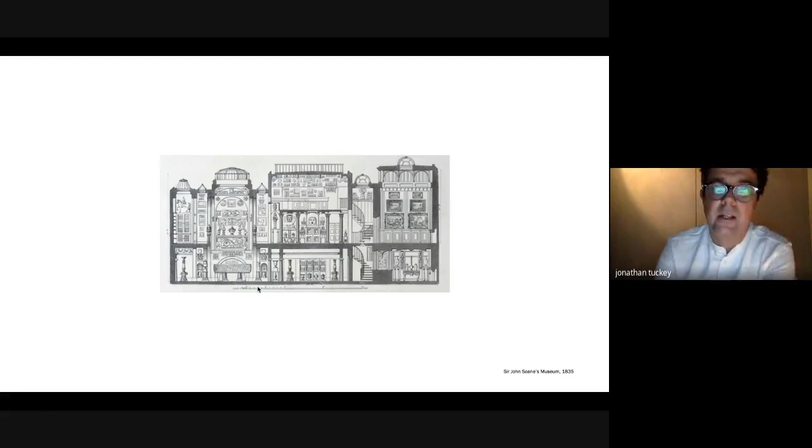And I think it's that idea that a building is made up of parts that are all performing their own function that is a way you can look at and understand a classical building. You can take a classical room, and it's somehow similar. To repeat what I've said about the column and then the section, those separate components equally exist here. It isn't just continuous between the base of it and the top.

The room in itself has these datums and proportions and delineations that determine that the ceiling is somewhere different from the floor. And this is different from a modernist building. If you think about a modernist building and a modernist column, that set of components is very different.

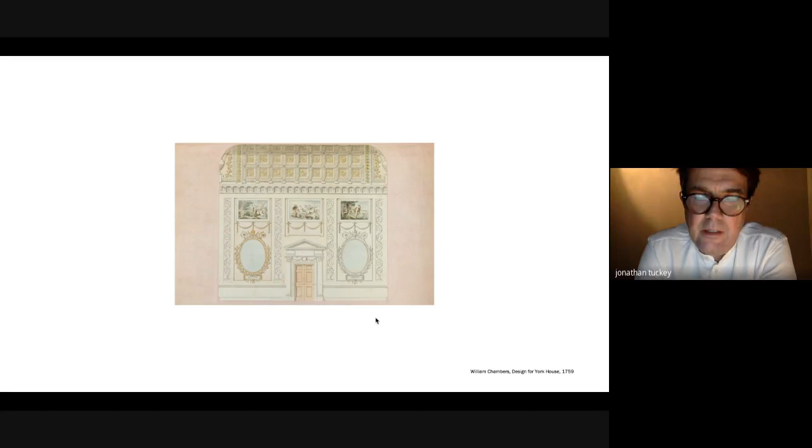And the rules get rewritten in the 1920s when the modernists appear, and Corbusier particularly writes a lot about it. But I think it's about understanding buildings older than that in this way of the components, and normally those components represent scales, small, medium and large, bottom, middle and top, and it's about those things each providing a different function.

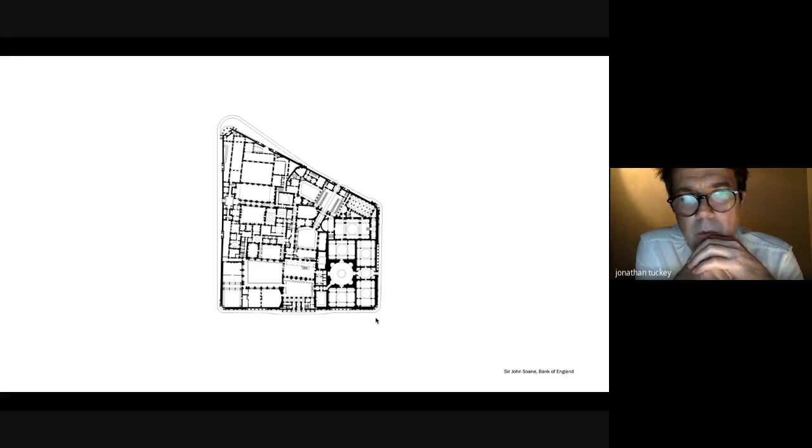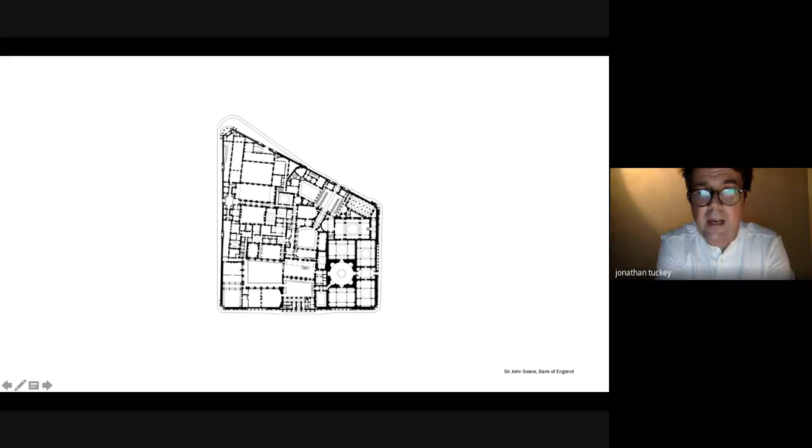This is a plan of Sir John Soane's Bank of England that he designed for the Bank of England in the centre of London, and the intriguing relationship I showed you in the section on those last two images is just as visible in a plan. There's nothing uniform about the arrangement and the accumulation of spaces. The arrival is a distinct and different proportion from the next sequence of spaces that take you from one space to another, and each of them will be appropriated a different proportion, and that will to some degree determine the use of that space.

So there's a large space for a bigger amount of people, and a small space for a smaller amount of people, or a large space for a certain atmosphere compared to a small space for a different atmosphere.

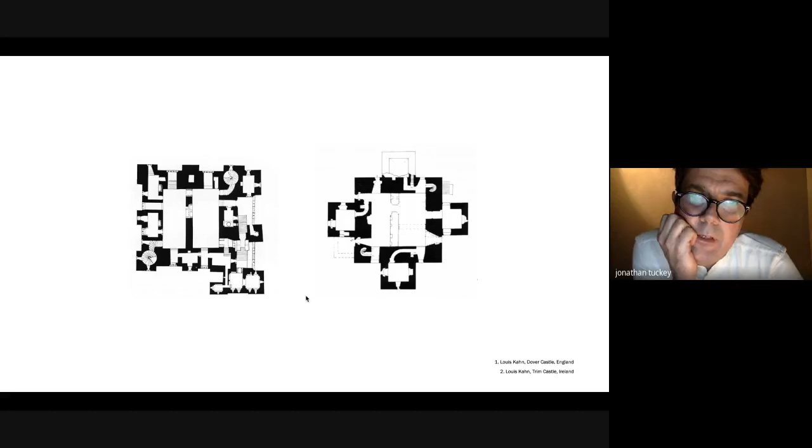And whether it's a classical building or this is a medieval castle that was drawn, Louis Kahn did these beautiful drawings and studies of castles at an early stage of his career. A lot of these castles in Scotland, he drew them for a different reason, which was about how to understand the primary space and the spaces that support it, the principal room, the servant space and the served space, and then the spaces that serve it.

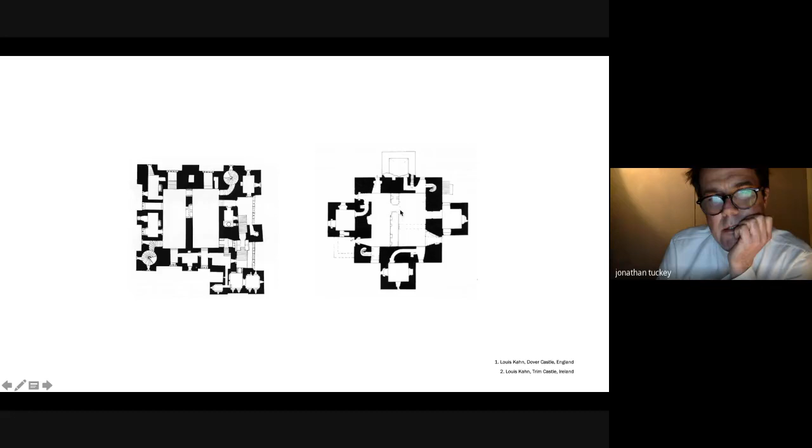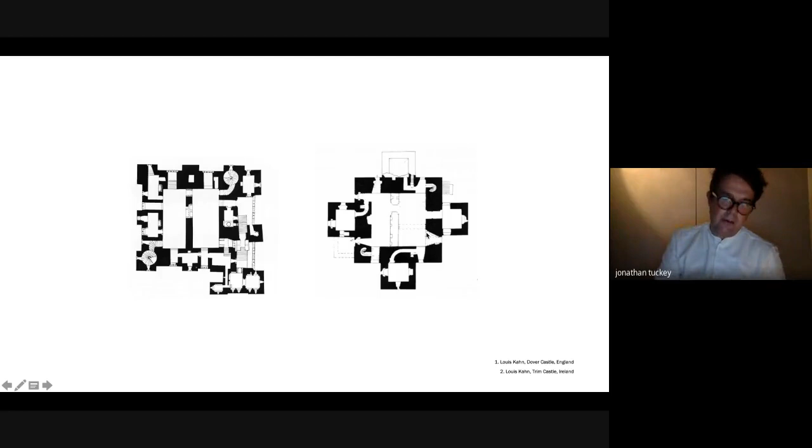And again, my observation and point about this is that they depend upon one another to perform their individual function. They have a symbiotic relationship, that if you take all of those spaces around the perimeter away, this no longer can perform its function because it can't be served by those spaces around it. And equally, if you were just left with those perimeter spaces without anything to serve, they would be without their function.

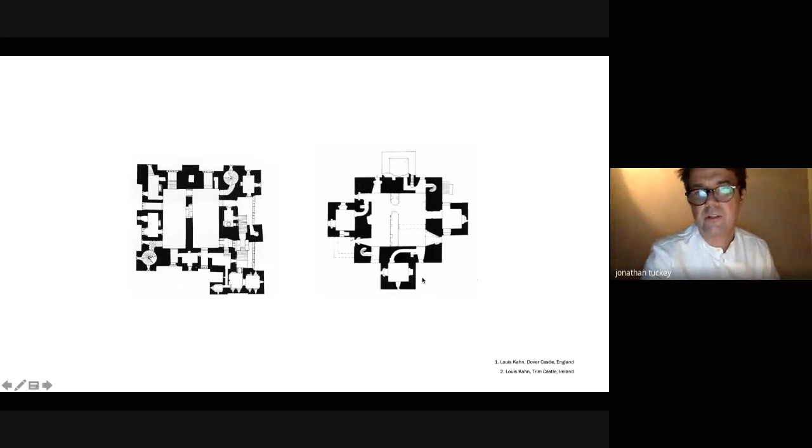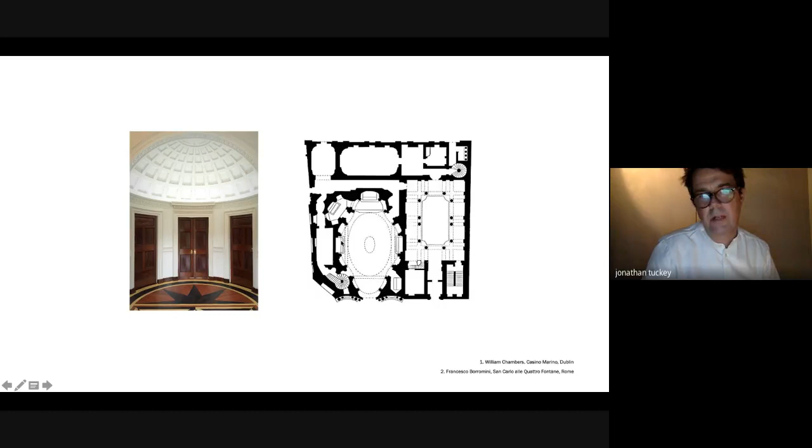And I think the same is to be said about these spaces in classical architecture in particular. You get this beautiful freedom with which to create spaces of different volumes and shapes, so that they can perform a very different spatial arrangement. And this very beautiful vestibule here allows the orientation of you to move through a space and then into these various different antechambers off it, in a way that a simple rectangular space is less able and less easy to manipulate and create.

So now back to the project itself and the plan that we started with. Are these clear for people to see? Are you able to see this, Adam? Yeah, that's clear. Cool. Okay.

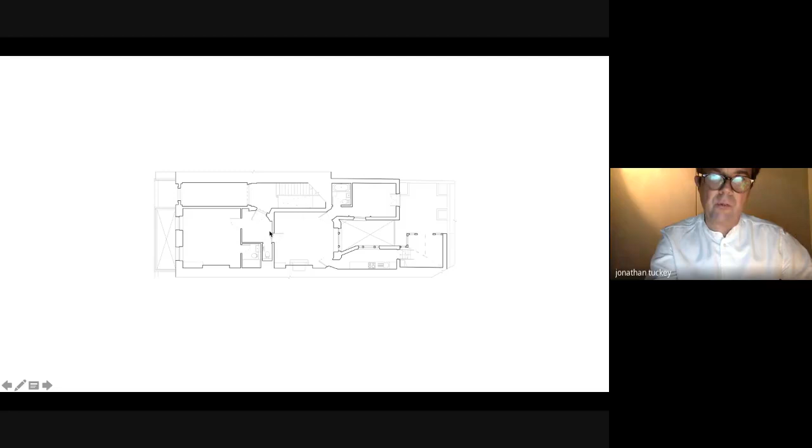So this is the apartment that the client came to us with. As I said, it's on Upper Wimpole Street, which is here, and it's a ground floor apartment. It's already been changed, but you can start to see in the thicknesses of walls that when it was originally a single house, you'd have walked in through this hallway here, and off that hallway you would have had one principal room here, and then another supporting room there, connected possibly by large double doors.

So, thinking of the Louis Kahn analogy, this is the space that serves these two spaces. They can't exist without one another. And my point about the street: you can tell that when the whole building was a house, this would have been the front room. And the front room in buildings like this would have been almost rooms that were a gift to the street, a space that you never kept closed.

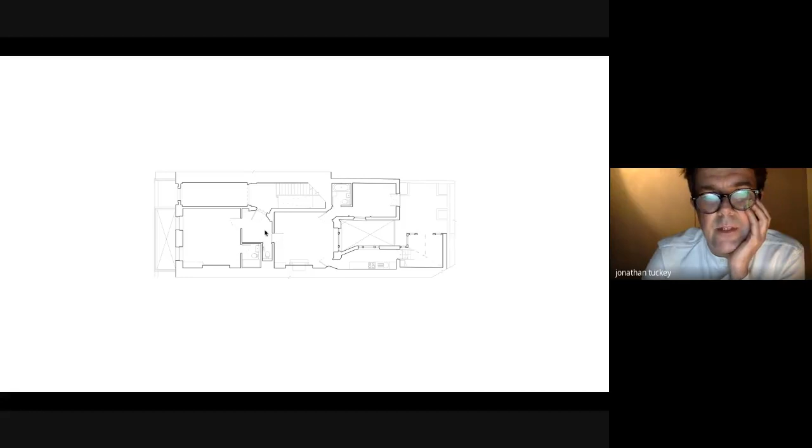You only performed the more public functions of life, special occasions, Christmas, birthday celebrations, or whatever it might be. And the idea that that front space needed to be separate from the street was never a necessity, because there were always other spaces behind where you could put your feet up on the sofa or watch the television. It had in itself these filters that were already implied, because you had other spaces on other levels for the acts of sleeping or retreat from the street.

For some reason, occasionally my mouse stops working, but anyway.

So if you ignore the new things that were added, the toilets here, the hallway here, and these other spaces, this plan would have been very legible and would have been a hall, a large room, and then a medium-sized room. And then possibly, I don't know, but I'm guessing some supporting even smaller room there, so that in a sense the most private part of the house on the ground floor would have been here.

And you would have walked through the rooms there. There would have been no internal corridor. It would have just been a sequence of 3 spaces, because you had all the spaces upstairs. Someone at some point, because they needed to, converted this and added some bathrooms and hallways into it. So by the time we arrived, you had a small hallway here, and a little bathroom associated with a bedroom, a bathroom associated with another bedroom, a small kitchen, and then they'd built this little glass box in the garden for eating, I guess.

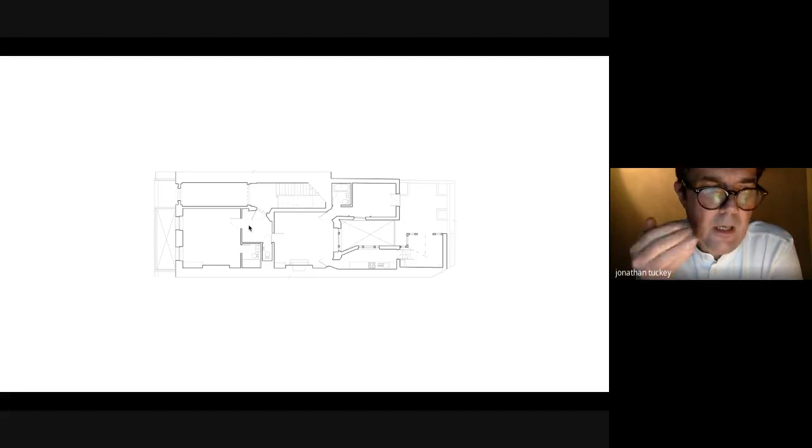I mean, I know it's not the case when you're in a student hall, but the idea that in a house there are a number of spaces that take you to that more private space is a convention that certainly in European and UK domestic architecture is familiar, and they felt very compromised between the bedroom and the hallway.

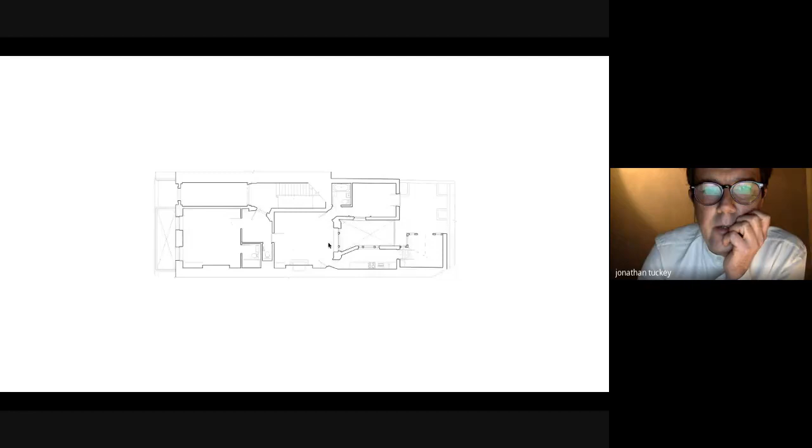You would come in to the hall, and if you wanted to come into the main room, the main feature was this fireplace, which obviously is destroyed immediately once this partition goes in. We had to keep the partition because they clearly needed a bedroom and a hallway. So what we built was another piece of joinery, another piece of cupboards that forms an equal curve to that, running around that side there. This WC went and becomes part of a bigger bathroom there.

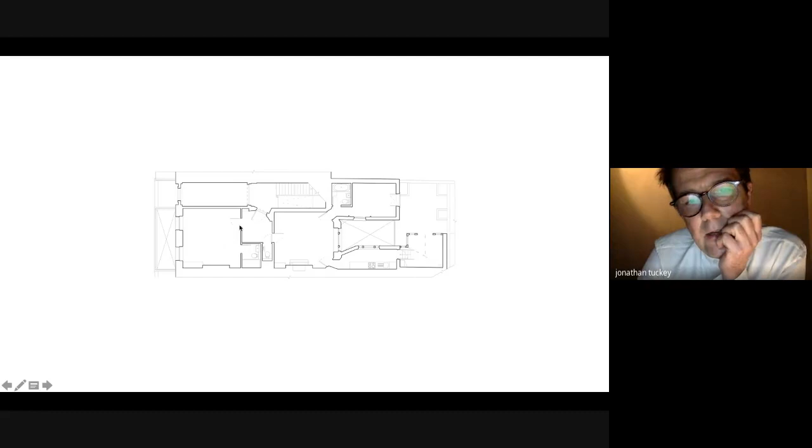And that simple curve there that then runs into the joinery that you saw a picture of here means that as you come in, I think it softens that arrival. You're not looking straight at the corner, and it directs the main flow of the public route, if you think of it as guests, in to that curve and into that space there. So that's that curve there. It's actually where their coats and shoes are kept, but also guest coats and things like that, essential storage for the flat that didn't have much.

Previously the floor throughout was just all timber. Again, it was modernist in its agenda, in the sense that it was one floor finish throughout. It was completely uninterrupted and didn't allow you to pause or think about a change in pace between the arrival and the next space. So we laid in this area these tiles just to act as a kind of stasis between the arrival and the spaces beyond that.

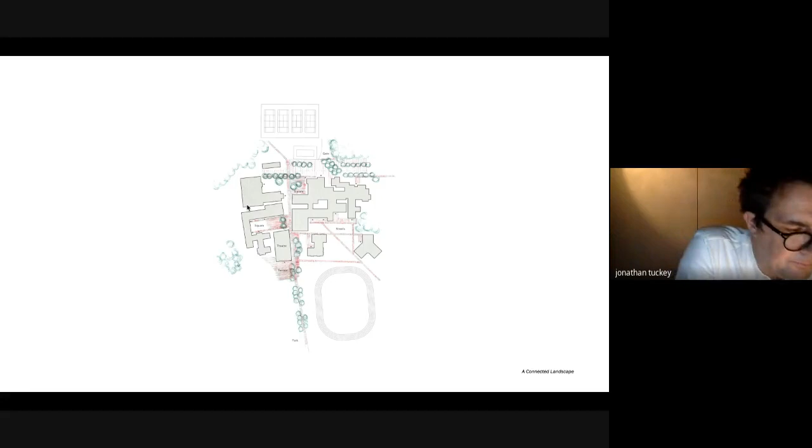And he felt that if we were to think of this as a kind of mini town, it was essential for education to have a permanent theatre, a theatre that formed a permanent function within the life of the school and within the education that people were being provided.

You'll probably know this, but the origins of theatre in an ancient sense are that it was really the place in the city, the town or the community where you could act out things that were not allowed in everyday life. You could fall in love with someone you're not meant to fall in love with. You could kill someone when you're not meant to kill anyone at all.

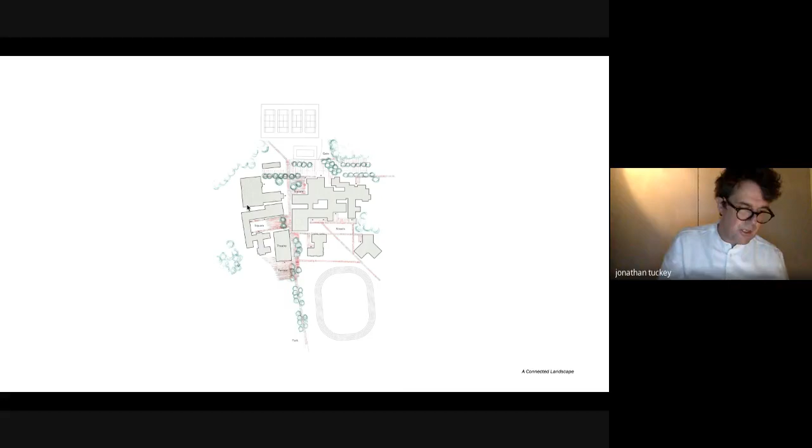Its role was to provide the full spectrum of activities that are forbidden by our normal conventions of life. The theatre used to be outside the city walls, and was for people to go and let their hair down, both to see things acted out and to break taboos. That's what theatre was always for.

It's only much more recently that it's often become quite a stiff and uptight place, to be quiet and have the lights down and watch something for expensive tickets. Actually, its role was really to challenge the conventions of life and to test out breaking the rules.

And he felt that in a place like this, in an education curriculum, theatre really needed a permanent home, not just for school plays, but for drama to become an essential part of the curriculum and for people to learn how to perform.

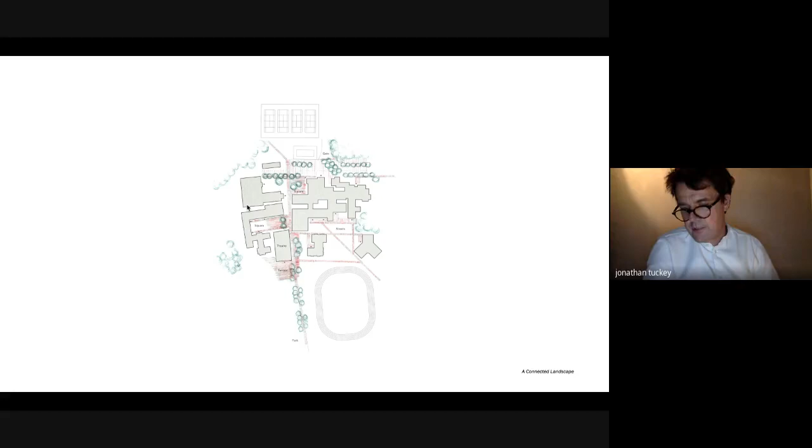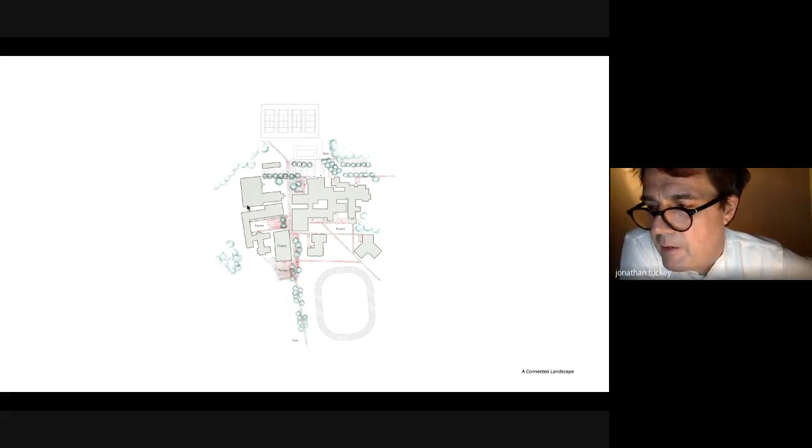I mean, I know you know that's what's amazing about an architectural education is you have crits and you have to stand up and present things, and it's an amazing, terrifying but amazing thing to have to learn how to do. And actually, if that can be part of everyone's education, it kind of empowers you in later life to understand what presenting something is like, standing in front of a group and shouting something out, singing something out, or showing something off.

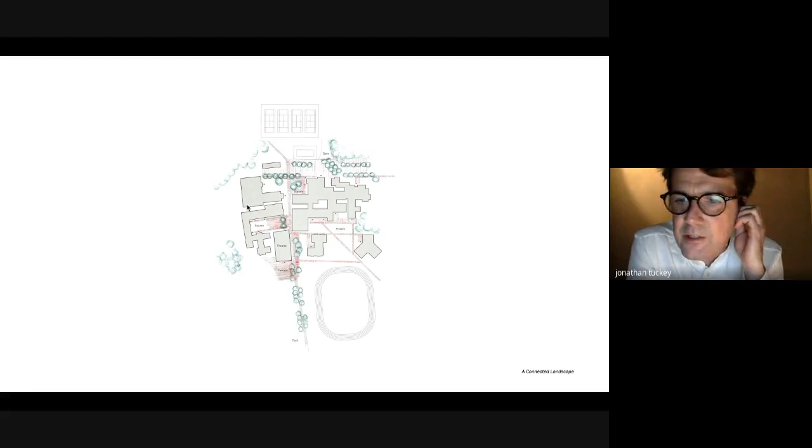So that's why he felt that theatre couldn't be just in the gymnasium. It needed to have its own place, and it needed to have fixed seating that couldn't be swept away. It needed to have a stage that was at the right height, and it needed to have the acoustics that people didn't have to feel intimidated by an echo, that the acoustics would work for a single pupil. Or, sometimes these pupils were young, so something that worked for them.

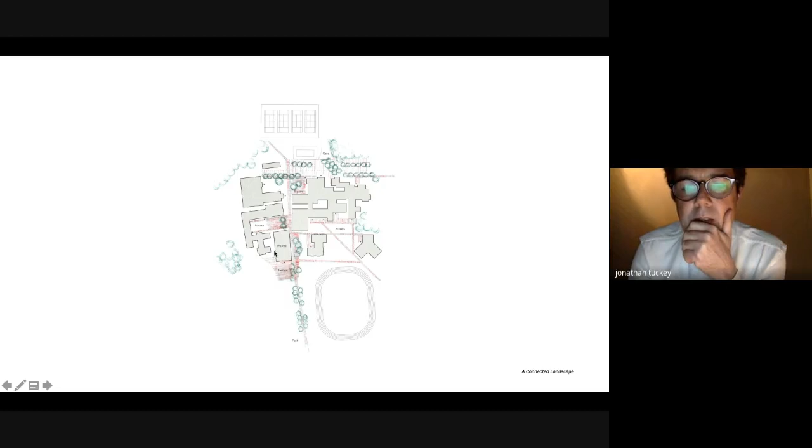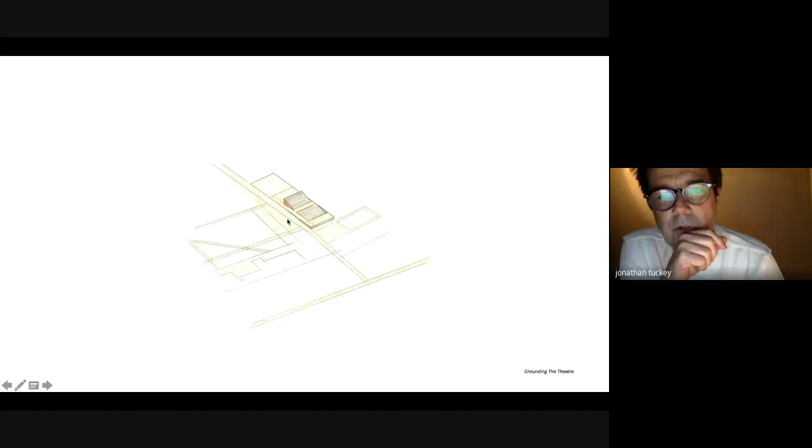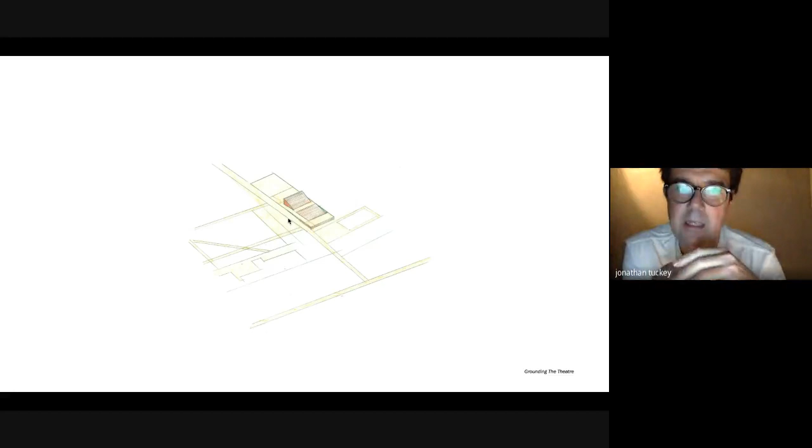So that became our remit, this site here, and thinking about how if the DT building moved the facilities into one of these other buildings, we'd place a theatre in this location. And this is a kind of early drawing of the streets of the school and the various different alleys and courtyards and routes through it, and how we felt the theatre had a permanent ground, like the seating was both dug in and raised out of the ground, and we and the headmaster were completely aligned that we didn't want the seating to be one of those removable seats that sort of compress away. It needed to be an absolutely essential part of the landscape.

That's something very permanent, and this is a drawing just thinking about how we could make something that was kind of forever, indelibly part of the landscape. If the building above it blew away at some point, this arena for performance was always going to be there and indelibly, irremovably present.

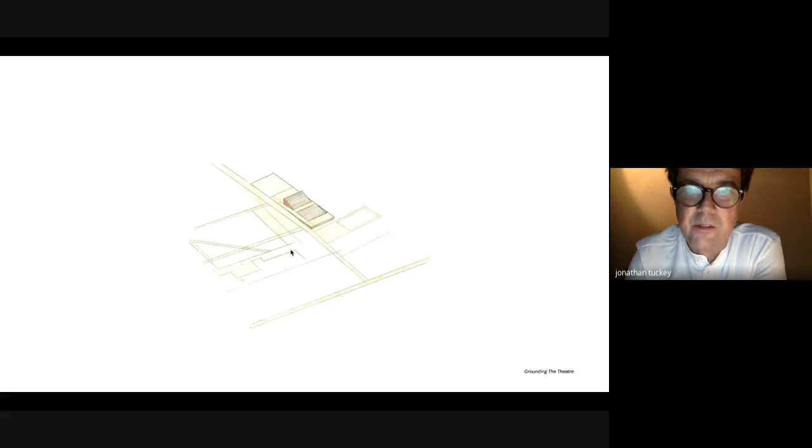These next five or six drawings were a bunch of drawings we did at the competition stage. There was a competition to get the project. I think six or so people were asked to do it, and these were done over the course of a week when we got their brief, and to some extent the project is very different, but to another extent some of the original ideas are still there.

So we just said, you've got this kind of amazing avenue of trees, and at the moment it feels like the school's on the right and the sheds are on the left, but let's make that kind of avenue into the city, you've arrived in the town and that's the town square. So could we think of the building as not just a theatre, but could it actually have a function that was like a civic square, like the kind of meeting place for a community?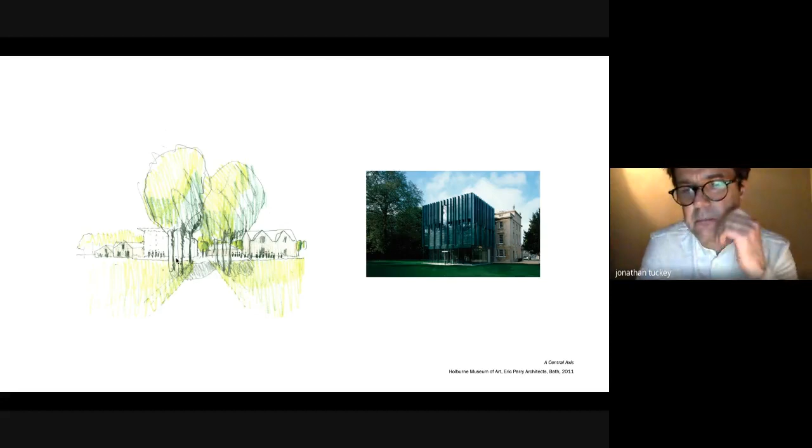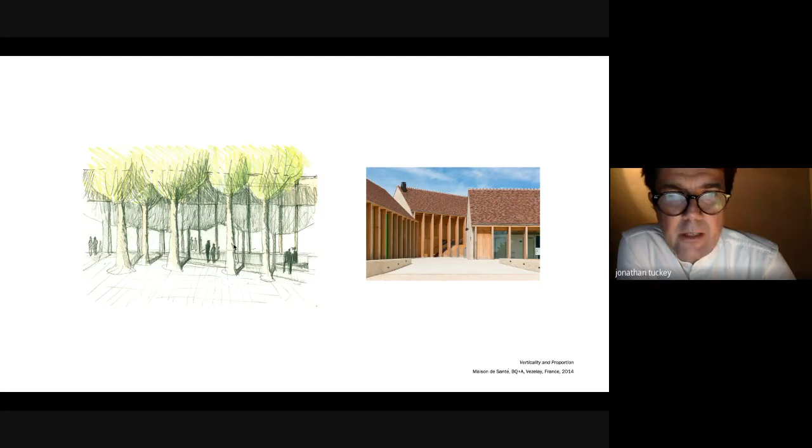We liked the fact that these trees would always produce sort of beautiful shadows on the building, and almost like a colonnade, a place for you to gather when it's hot and sort of hang out, like you see people sitting in the colonnade on a market square or something. Could the trees themselves become part of that? And maybe the facade could have something of the rhythm of those trees.

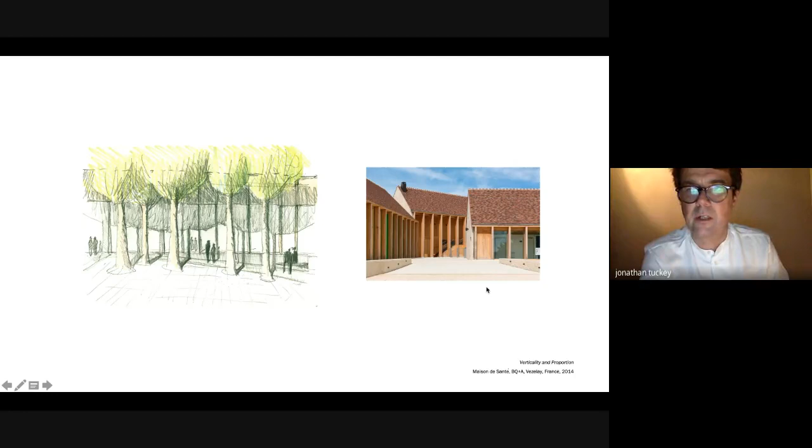In this case, we were imagining we were going to have a little gallery on one side of it that was partly open to this colonnade, showing this idea of what it could look like. That was going to be the gallery on the inside. The idea was the entrance was along that side. You'd walk through a gallery and into the theatre, so we were constantly trying to think of ways in which other things could come into the theatre, so that it wasn't just the drama kids or the assembly in there, but the art pupils could hang up their art in it, or there could be exhibitions in it.

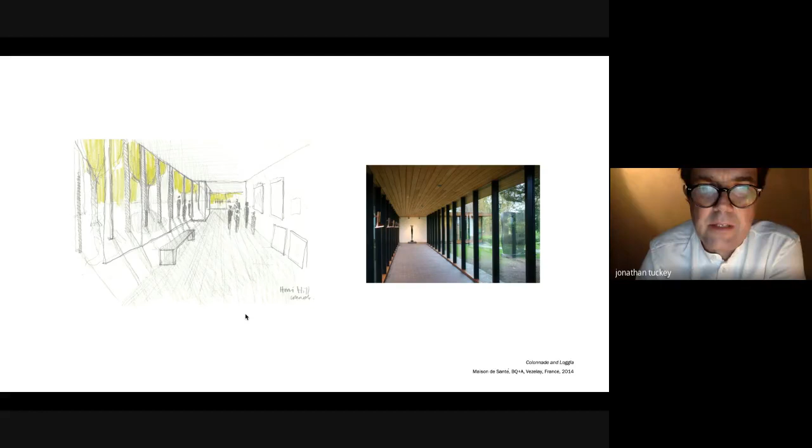So I think it was, and is, the nature of a lot of architects to always try and expand the brief. And we thought maybe it would be a nice idea to bring a gallery into it. As with all these things, a lot of them got cut because of cost, but the ambition was again to try and make the building as public as possible, or used by as many people in the community as possible.

And then this was the kind of front. At this stage, we had the front coming from the south. I don't know why we did, but we did, and it was.

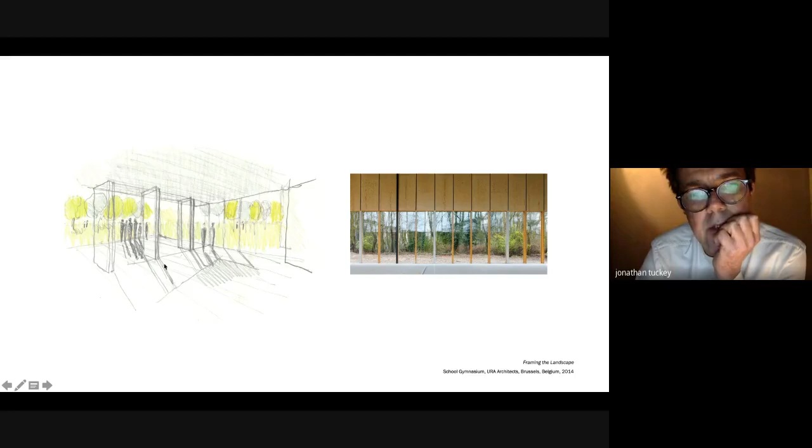You'll see we changed that, but you'd come into this foyer and then you go down the hall, you come down the gallery, and then into the main theatre. And then we

also felt that it felt a shame to have a black box, a box that was great, perfect for theatre, but was pretty soulless for assemblies or for daytime drama lessons. So if we could have windows that looked at the trees around it, but then could be covered up by curtains or shutters or something, so that it could be as good for someone playing a concert during the day as for a production in the evening.

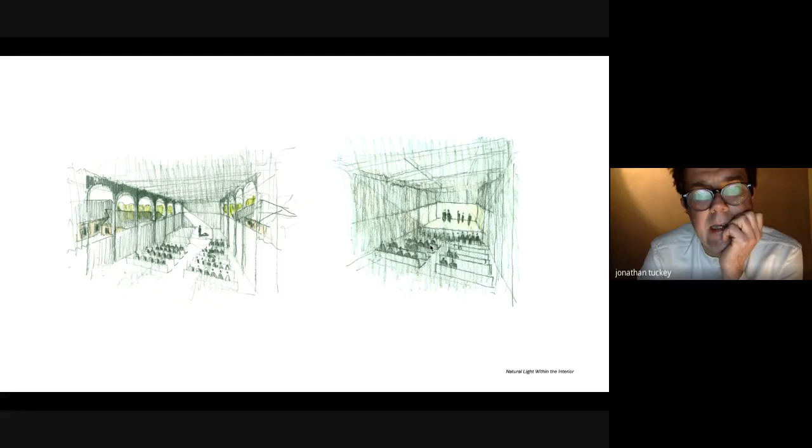So we were interested at this point in making it as useful to them during the day as it would be in the evening. And I think there was and still is, environmentally, I always think it's crazy to just have buildings or rooms that you go into and you have to turn the light on. It would be nice to come in, even if it wasn't always bright, at least you could see. It just feels our responsibility as architects is to think in that way, that you can go in and there's daylight. If you need to just go and get something, it's not about always turning the lights on and therefore leaving them on.

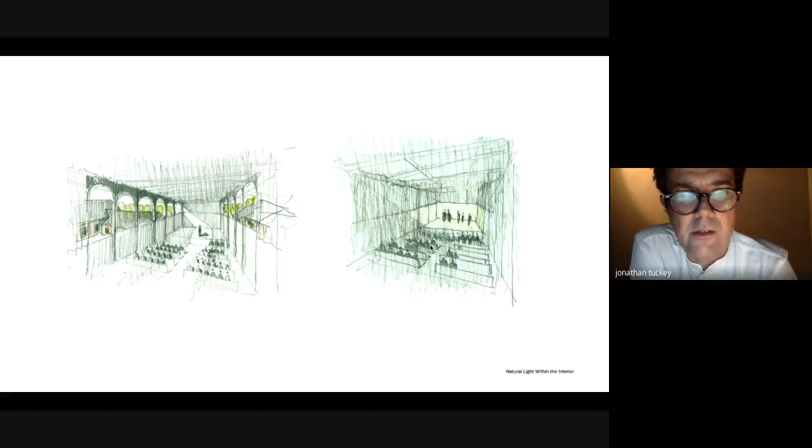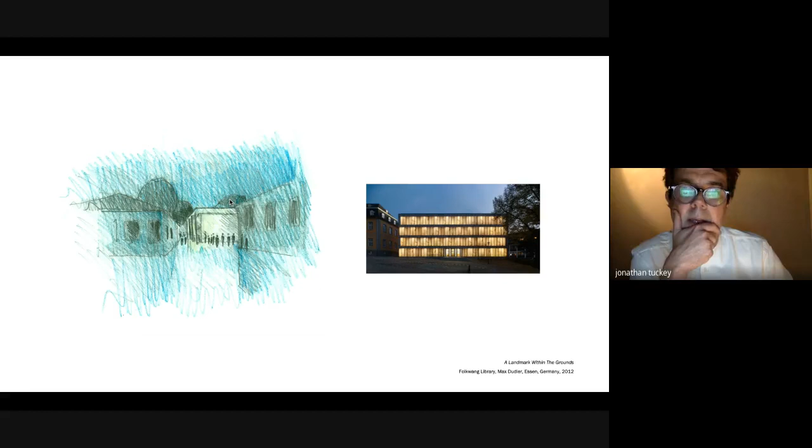And we thought a lot about how it might be a lantern at night, so that as you arrived in the school, this is a view of it from the other end, but as you arrived into it or saw it at night, times of the year like this when it's dark from about 4 o'clock, and the pupils are still at lessons, it could act as a bit of a lantern in the middle of the school. Again, really just trying to think of ways in which we could make it more central in the life and in the position of the school.

There was an idea at one point where it could feel good for just the school, but when everyone's parents were there, it would also feel good. So we didn't want it to feel empty when the parents weren't there. So that was going to be closed off. On assembly Monday morning, it'd be closed off, and then when everyone was there, it would feel full. So there was an idea at this point of a way in which it could expand and compress depending on the amount of people that were there.

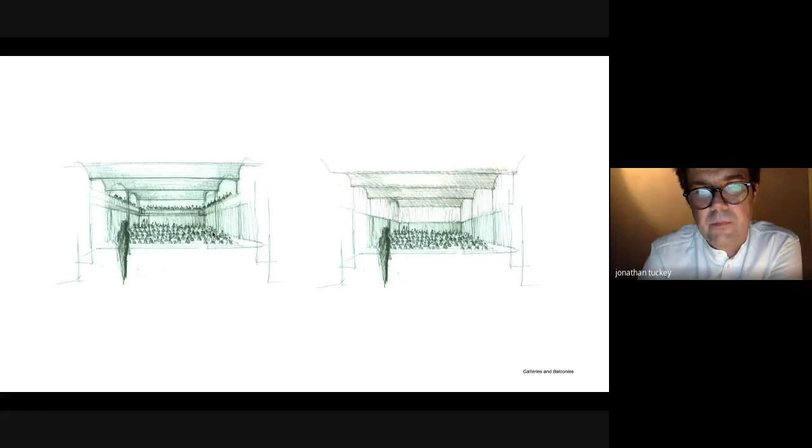These, again, were all ideas, I guess, that helped conclude the competition rather than what we ended up with. And because at that point we had turned it a different way around, we thought that maybe at the back of the theatre, at times when they wanted to be outside, they could open massive doors and perform or gather people in this space here. So you get 120 people in the theatre, but you could have 240 people out here on a summer evening, and it would actually be an outdoor stage.

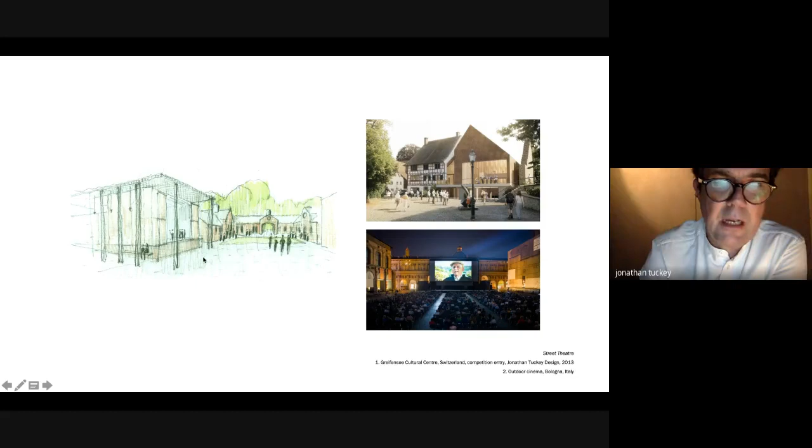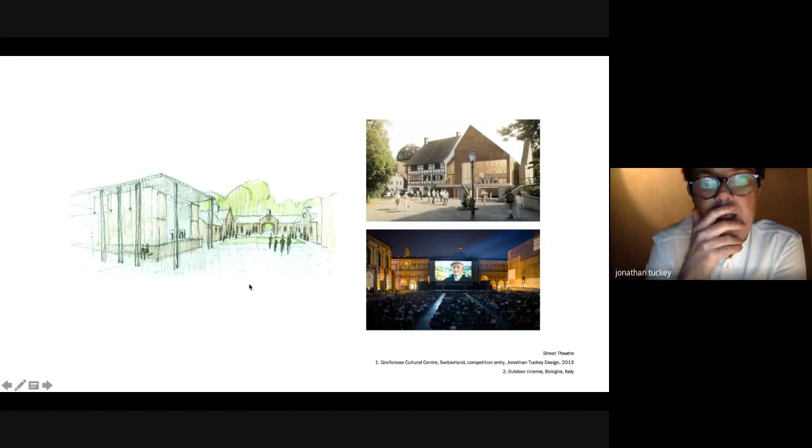So at that early stage, just like the gallery idea, we were thinking of how many things we could add to this theatre, so that it wasn't just a theatre. They were having to raise money, and we wanted to say to them, let's not make this just a theatre, let's make this a theatre, an assembly hall, an outdoor theatre, a gallery, and have all these other attributes and components to it.

And there was this drawing about how the building should be able to heat, light and ventilate itself. The thing with theatres is you don't really have to heat them, because when they're full of people, each person that sits in the theatre gives off 100 watts. So if you've got 12 kilowatts in there, it gets warm very quickly. So all you've really got to do is ventilate it, and you can either do that mechanically with air conditioning, or you simply open louvers or ventilation at the bottom on either side, and something at the top, and you get this chimney effect of cool air coming in and the hot air going out.

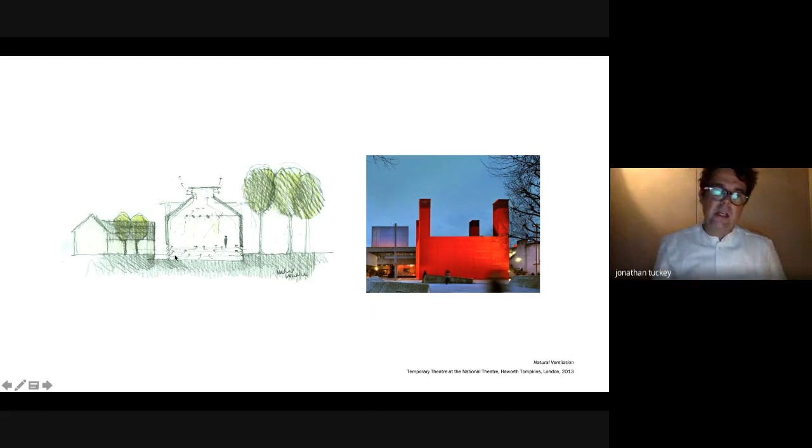And this is a nice temporary theatre that Haworth Tompkins did in London for the National Theatre, and that's what these chimneys were for: cool air brought in at the lower level, and taking the hot air out. We felt that would be a really good strategy where you could avoid expensive and environmentally insensitive ventilation, and just bring air in and bring air out.

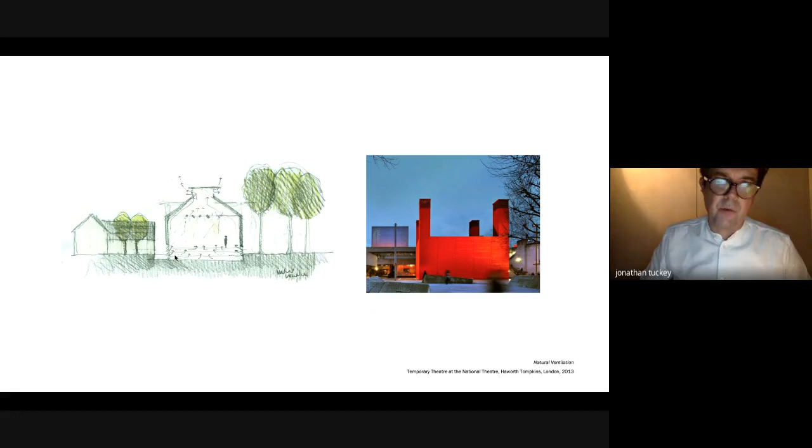So those were the initial kind of things that we pitched to the client. The things that kind of were in our mind that we had knocking around the studio at the time, which we didn't really share with the client, were images like this, which we kind of knew that

we knew that a theatre is essentially a kind of massive box, and in the wrong hands, that could just become like a kind of enormous B&Q shed, really. I mean, we needed to think of a way in which we could articulate the facade like these buildings in Florence here, which would bring a three-dimensionality, a thickness, a kind of layering to the facade. So we didn't know how we were going to sort it out, but we knew that we were interested in kind of ennobling this shed.

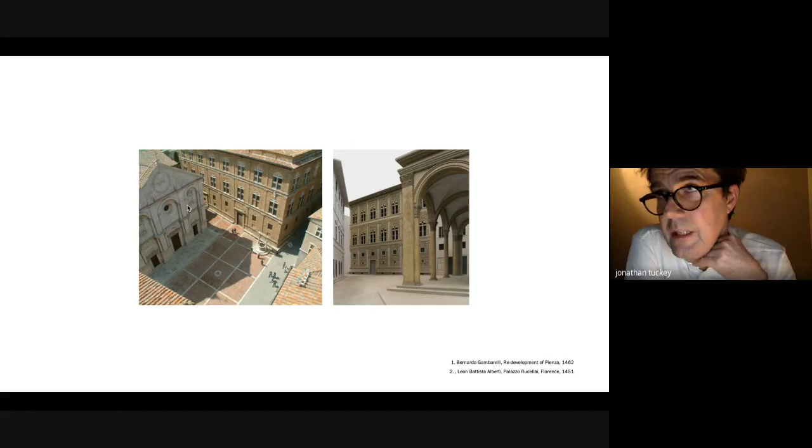And these architects, Alberti and Gambarelli, but also Palladio, were in their time extraordinary at introducing proportion to facades that allowed a kind of three-dimensionality to them that broke up and articulated a building. If you actually think about this building here, it's got three openings on that level and one opening on this level, but the kind of layering and the drawing on the facade of these different sets of proportion, a bit like that classical order, completely determine and delineate it.

We also thought that this was an idea for us, the kind of civic square, creating a square, and we noticed that this one was north facing, and it gave us confidence that maybe we should flip the building round and have the front of the theatre where I previously had the back, and you would come in through the front door, and that courtyard of spaces would actually make it a proper square, rather than leaving the theatre into the playing fields, which suddenly felt so wrong for us.

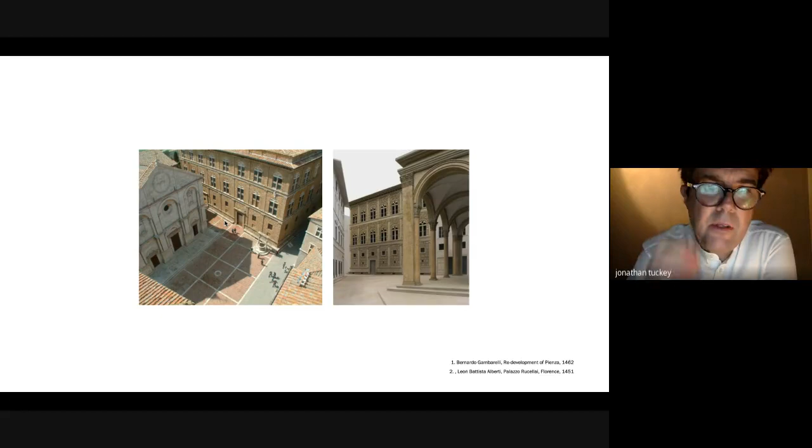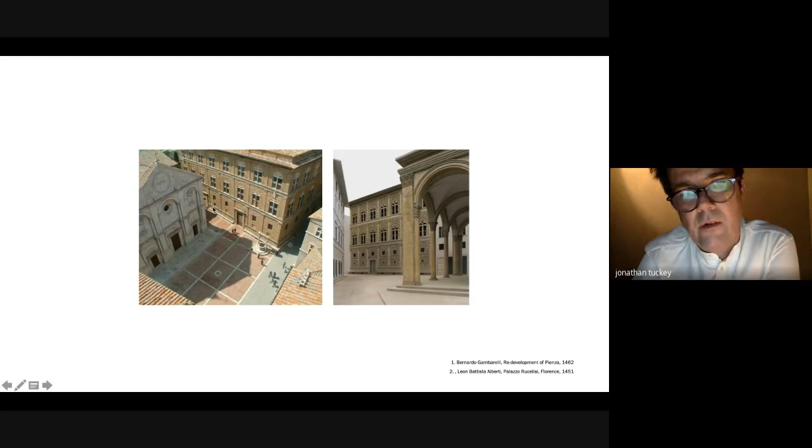And we liked the fact that these buildings were sometimes at different angles, and that we didn't feel that we had to align our new building necessarily with the ones adjacent to it. So that kind of tapering between this building here and that building as this one heads off was something that produced quite an interesting dynamic and proportion to the very different spaces.

So we had the stage and the backstage, and then the auditorium, and then we thought adding some sort of portico onto the front would really signal and signify the entrance and gateway. And because it might have these multiple functions of a theatre entrance, but equally assembly, there might be a side door directly into the auditorium that the pupils would use every day for assembly. They wouldn't always come through the front theatre door; that would be for the production. So just by entering a door, it adds two different faces to how the building was used.

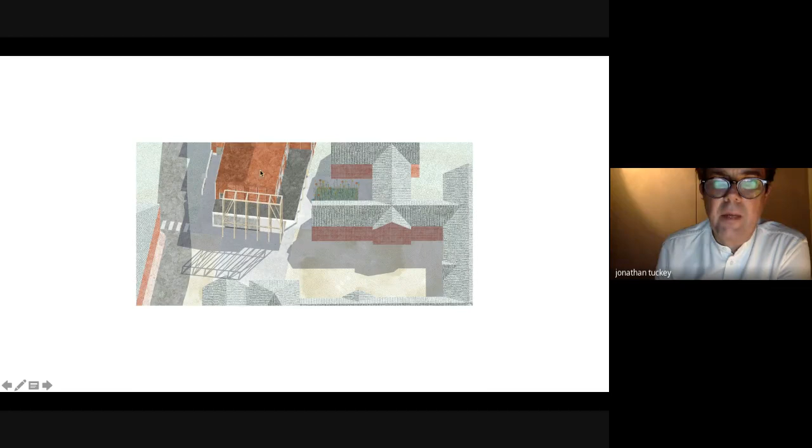And the foyer, we lost the gallery, but we kept a colonnade along one side, so that there were no changing rooms in here for the theatre, because they could use some of the classrooms in here to change. Again, money, such like, and there were toilets and classrooms in here. So when there's a big production on, this serves as providing the loos and the changing. And then the pupils will come out here, go into this external colonnade and to the stage through a doorway there. And then the arrival into the theatre is under this colonnade here.

And that's a view of it in the city, or in its environment. So at this point it starts to take the same colour as the main. At one point it was going to be white, and then we thought, actually, let's think of a material that's the same tone as the red bricks that actually make all of the space around it. And by turning it around and making that square, we thought that would be the kind of civic square, the kind of urban plaza to the place.

But we still retain the idea that the back of the theatre could still open at the back, and we would create a kind of small amphitheatre with low timber benches around here, so that idea of a bigger event around the back of the theatre could be kind of summer production. They couldn't afford a big opening, but we just put 2 doors, a bit like you find on those weather clocks that have a man and a woman coming out the left and right door. Those would be the sort of stage doors that connect the stage, and you would come and do your production on the south-facing stage here into an amphitheatre.

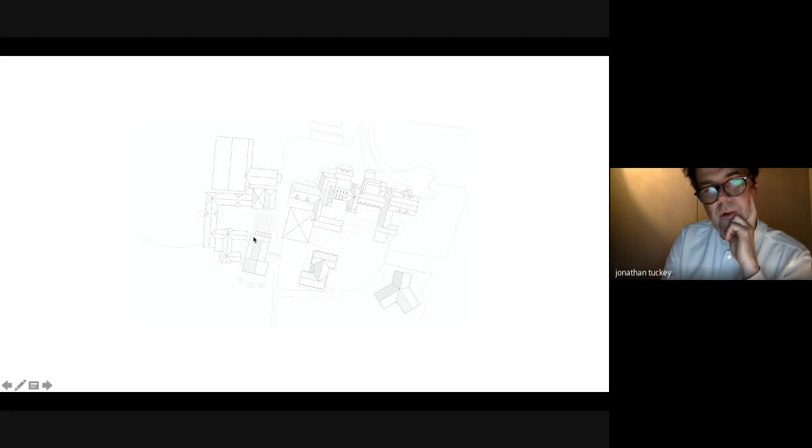And that's the external amphitheatre, and it's now really just made of these 4 volumes: the stage, the auditorium, this wraparound section, part of which is internal, which is the very small foyer, and part of which is this colonnade, and then the timber portico structure at the front.

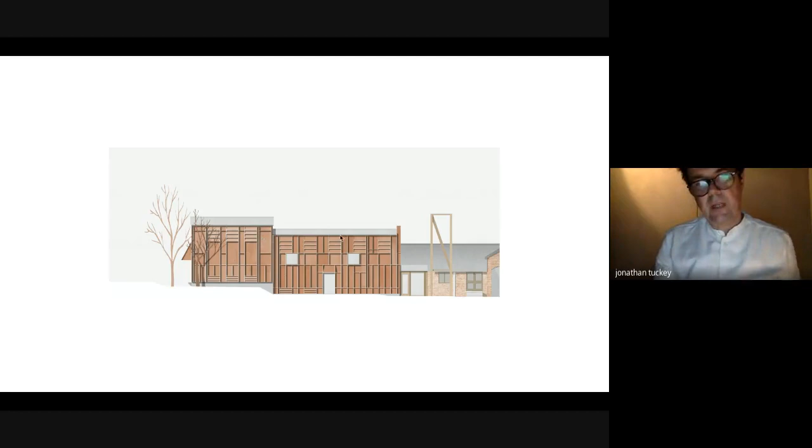Some drawings about how we would divide up the facade, you know, like drawing on a facade. As I say, it was these 2 big boxes, and we knew we had to have these low-level vents and high-level vents to get the natural ventilation, so those were given. So if we could think of a way in which we could conceal those, we knew we wanted daylighting, so there was going to be these other things that sort of slipped in their geometry, then the rest would be kind of panelized.

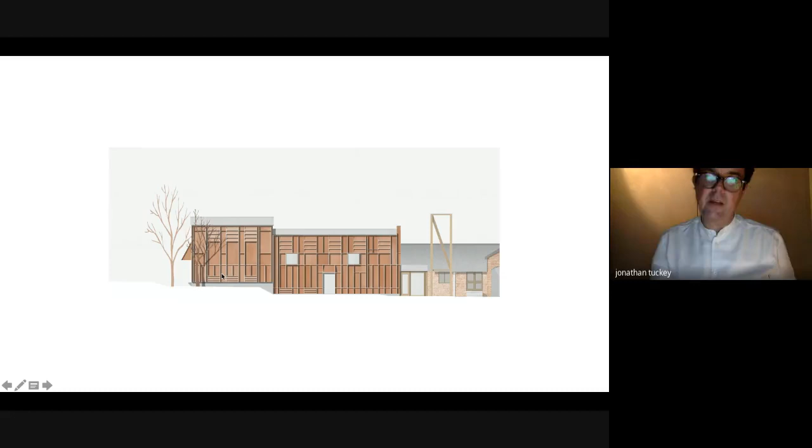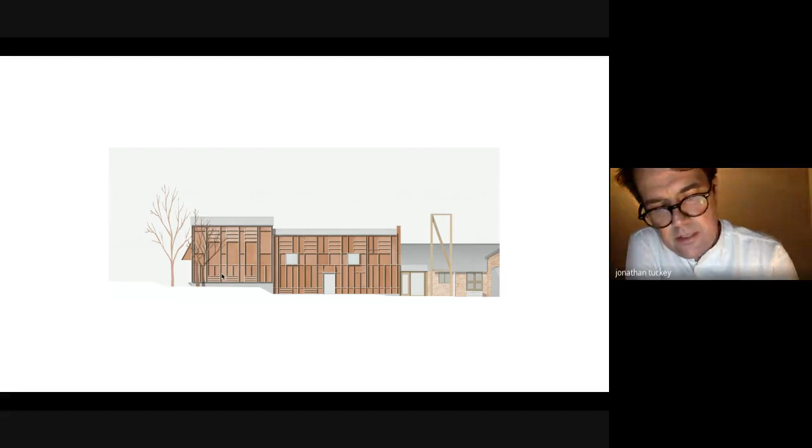And we found this material. It's actually made out of recycled timber and cement, and it's a panel board made in Portugal called Viroc, and it comes in 3 or 4 standard colors, and one of them happens to be very similar to the brick of the buildings around. So we knew we could make it and afford to make it out of that, but it's only 18 millimeters thick, and so we really didn't want it to look like a thin, flat building.

So we divided it up into panels that were then subdivided by these ribs that then give it this relief and 3-dimensionality that I think we found on those Venetian churches. That's a little kind of porch over the 2 doors on the back, and that's the freestanding timber structure that kind of welcomes you at the front. And that's the little side door that was originally a big gateway, but just becomes a door with another protruding canopy over it.

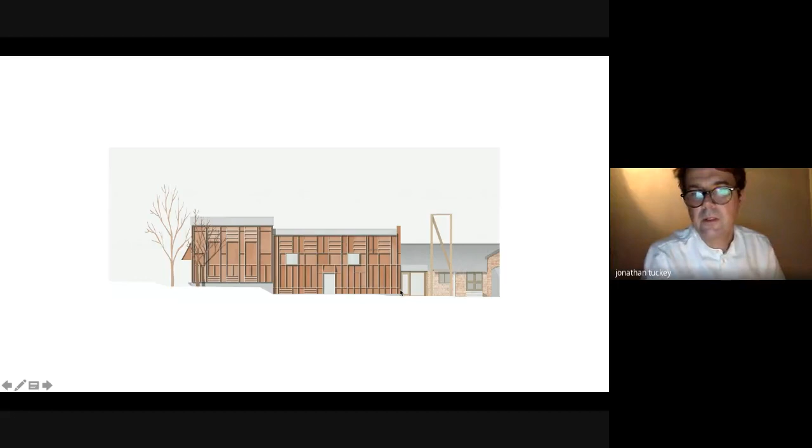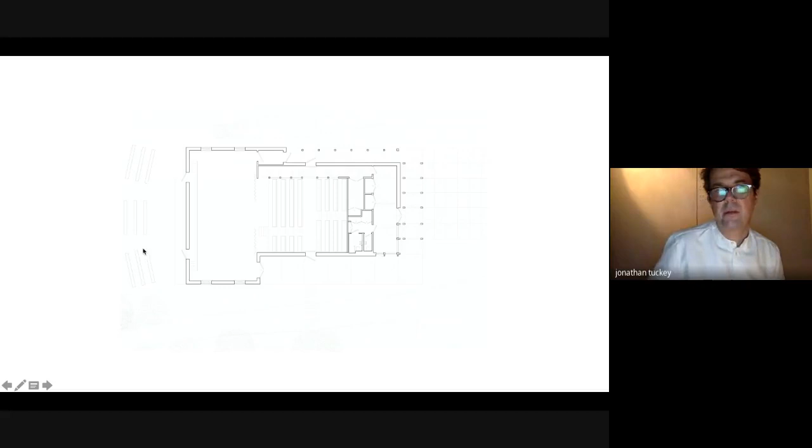The upper level of the theatre, it no longer was 2 stories, but it carries on up above the storage below it, and then this is a sort of sound booth that was super big, so that a class of pupils could learn how to do lights and sound productions. So that's the control booth. You can see the windows around the auditorium, 5 of them, all able to be closed by little manual wooden shutters. And then these are the vents at high level that I mentioned earlier about natural ventilation.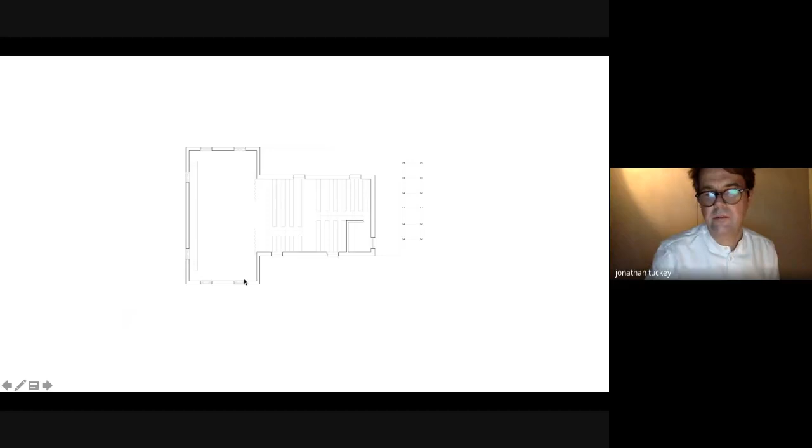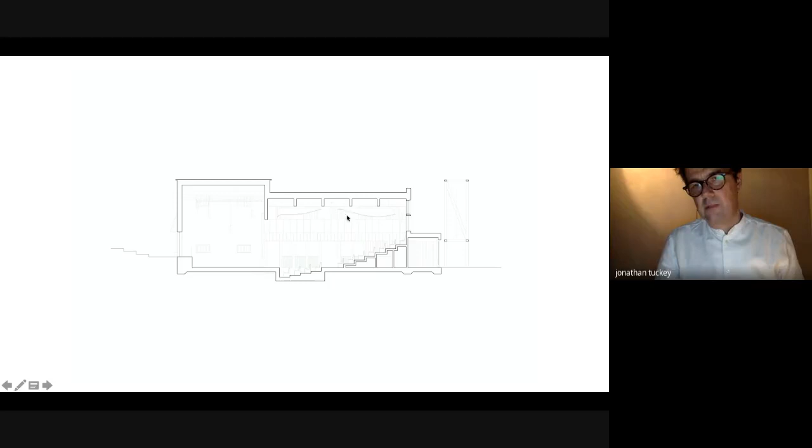Section through the theatre. So first thing to note is that level access. So that's the route through if you can't go up and down steps. There's the steps that rise up and the steps that dug down into the ground, so that's that feeling of that permanent structure that can't move. And then this is this curvaceous acoustic ceiling that's worked out so that if you're standing there and you speak, it bounces the sound to these back spaces there. So it acts as a way in which voice and instrument sound is more easily heard than if it was just onto a flat ceiling.

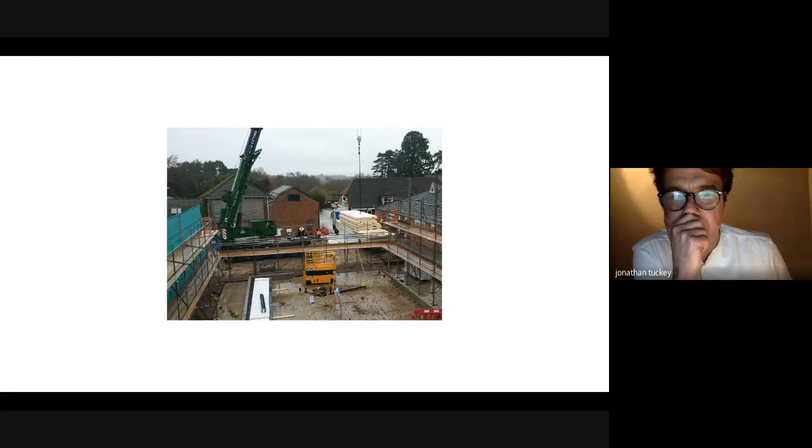So this construction took a year. The base of it was concrete, you can start to see the foundation of it has already been laid there. So it was just concrete with this upstand, so that anything above it doesn't get wet. So there's a sort of tray of concrete, as it were, that stands up like that.

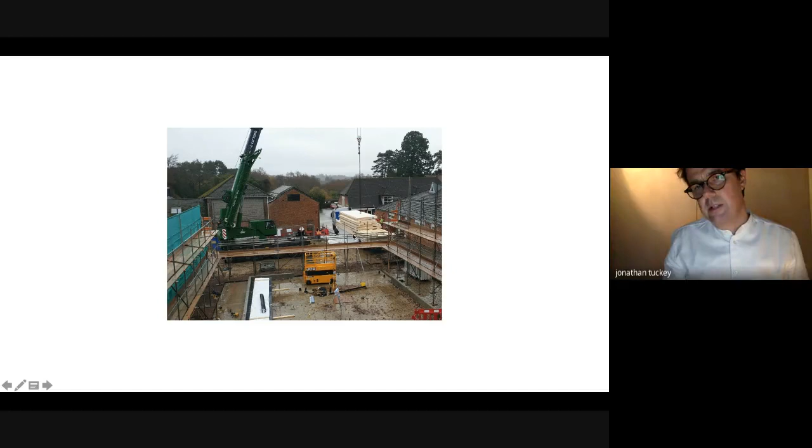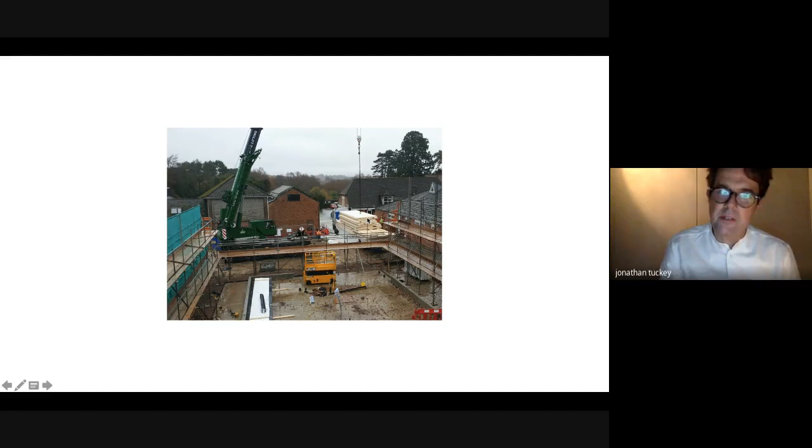And then the whole building was made in cross-laminated timber, called CLT, came over from Austria on a lorry, and it meant that it went from this state to a finished box, not finished, but a kind of a complete box in 4 days, because it's essentially like a kind of a large flat pack construction. These are, I think, 150 millimeters thick, and they have a bit of insulation, but they certainly allow the whole frame to be assembled very quickly.

You start to see it going up there. While it's all being screwed together, they have to prop it up, and then once the roof and everything's on, those props come away. So this is the stage. This is the pit that those seats drop down into, and you can start to see the walls in position, and then something being craned in position there. And that's the theatre at the front.

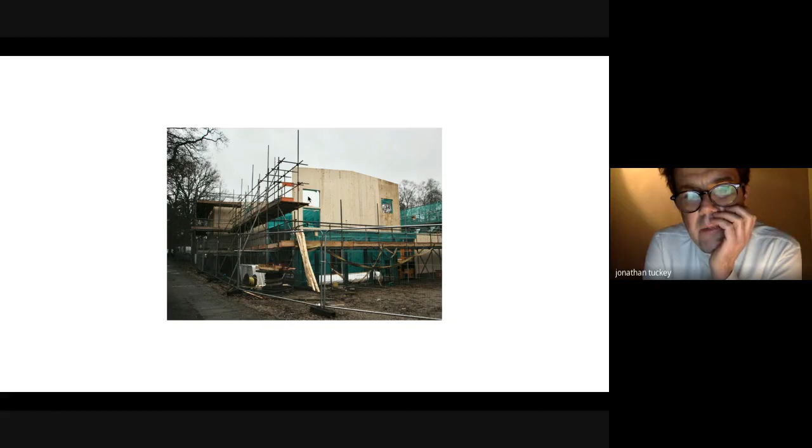The holes for the openings are already cut in Austria, so they're all in the right position, and relatively easy for them to assemble quite quickly, which was quite important because with the school in operation, you didn't want to have too much heavy construction going on as a sort of health and safety thing. So it meant that during a school half term, they were able to assemble the whole thing, get these things craned into position, and then were able to just work on the facades much more locally without there being a risk to pupils who are still going around the perimeter.

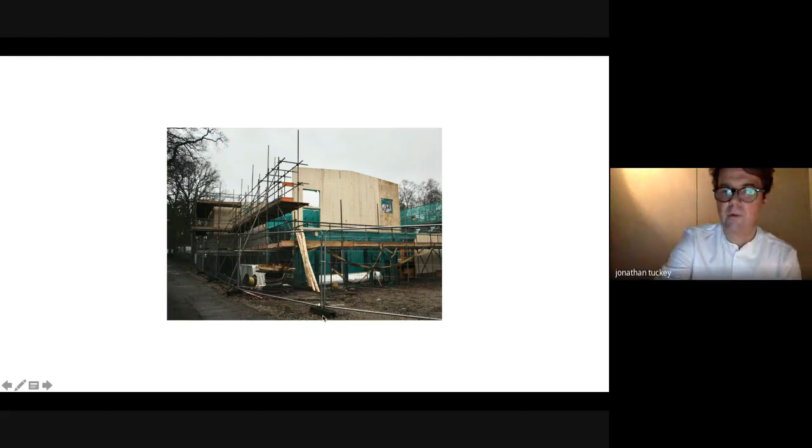Start to see it coming together in that space there. So the windows are just being glued into position. That's the side door. The roof before it had the curvy ceiling, and the vents. These vents are made in an acoustic way, so they kind of open, but they baffle the noise. So they've got very thick foam in it that allows air through it, but really muffles the noise. So if a car passes or they're shouting outside, you can't hear through them. That's the backstage with its roof on.

And the material itself was really nice. I mean, this was the cheap grade stuff. They have a number of different grades where you can either use high quality timber to finish it, or medium or cheap, and we chose the cheap one. And it looked pretty amazing, really. At this point, it's still flat and not the three-dimensionality that we wanted, but it was perfect for the backstage area. That's the side colonnade starting to come into position. So as a visitor to the theatre, you come down that space, but this is this external space that looks out onto the courtyard garden.

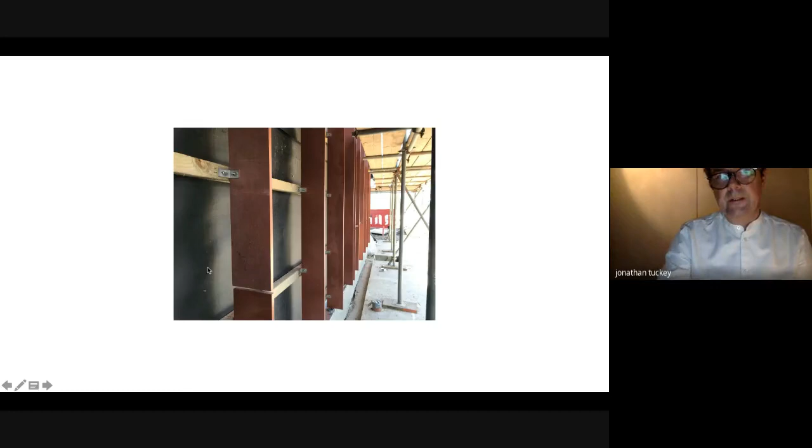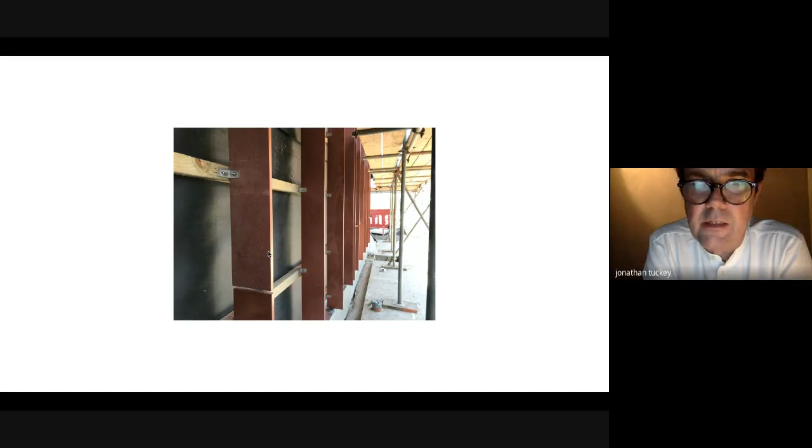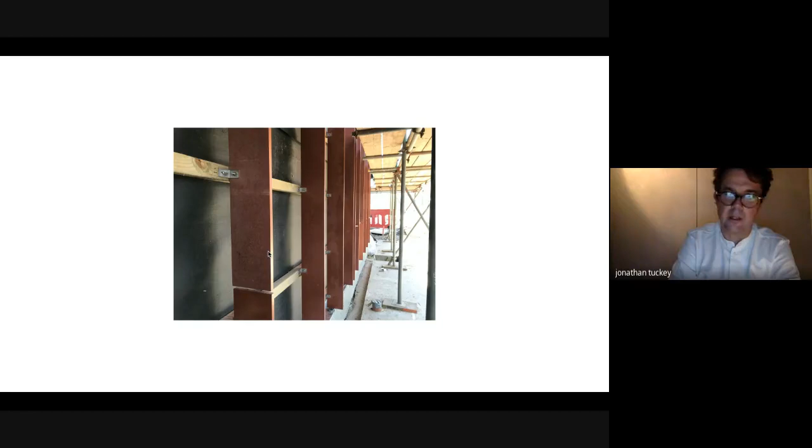And then the first arrival of these Viroc red panels. So the Viroc comes in, I think, 3 metre by 1.5 metre sheets. And what we did is, from that drawing that you saw of the panel, we predetermined all the sheet sizes, and it just got CNC cut in a factory, and delivered already cut. So again, it speeded up the assembly, but it meant that the labour cost was so much cheaper, because you gave it a CAD file, we minimised the amount of wastage, it cut it all, it arrived all labelled, and the builder had to assemble it like an IKEA table or something, and it meant the speed and the cost of construction was minimised and reduced significantly.

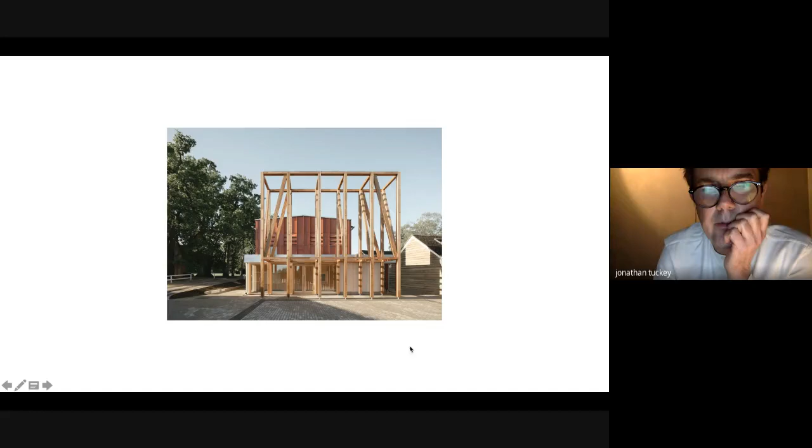We just felt, you see in these beautiful Italian cities, the way people just gather on the base of a building. There's something that sticks out, and it's where everyone's playing chess or reading the newspaper. And it just felt that in a school like this, where people are living, you don't need to necessarily go into the theatre to be using it.

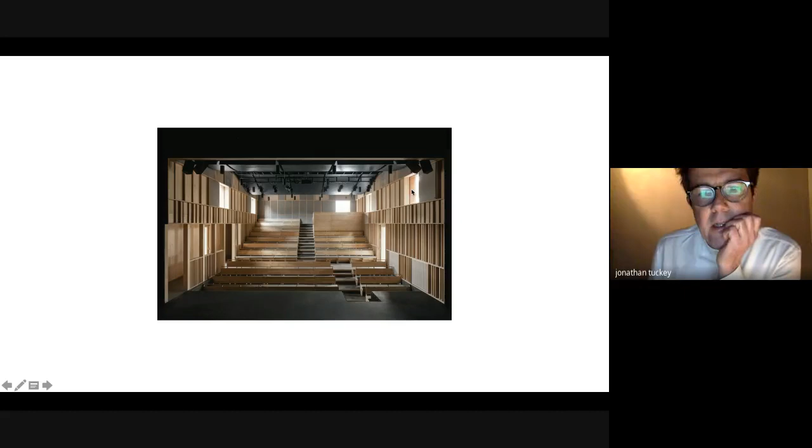So it is all just flat CLT walls, flat Austrian timber walls, but that's then been subdivided by very simple 25 by 25 mil beech battens that get nailed or screwed onto the wall in this pattern, partly to help the acoustics, partly to ennoble and change the impression of a flat timber box, and partly to bring in the proportions we've talked about, where there's a lower level, a medium level and a top level.

And the grey sections in between are acoustic material, literally felt glued onto the CLT that absorbs some of the reverberation on the walls. And you can see the sloping ceiling, which is just bent plywood folded on a timber frame and painted. That makes the lights and the technical equipment at the high levels all part of it.

Next to the windows, each one of these is a shutter. There's a big long stick that you can pull up, put on a hook, and then swing around and close these off, so you can just send up anyone to darken the theatre, and you don't need to get the maintenance man or a piece of technology to close it. We wanted it to be very manual.

So that space is this gallery on the left. The minstrels' galleries in old theatres are places where you're not always sitting down. You might be standing somewhere throwing food onto the stage or shouting, or it might be for late arrivals. So we wanted something that stops it from just being seating and stage, where actors can perform and shout from there, but equally it's like a little gallery space. And that's it there.